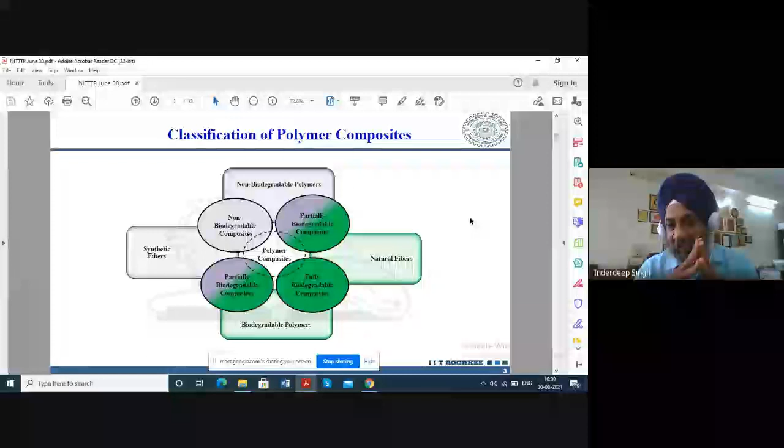Based on polymeric composites, most of the polymers we use these days all across the world, not only in India, are non-biodegradable polymers. Polymers like polypropylene, polyethylene, epoxy, and polyester, which are used for making polymeric parts or polymeric matrix composite parts, are non-biodegradable in nature, and that is a big concern for industry as well as governments.

Government policies are slightly in favor of sustainable materials, biodegradable materials, environment friendly materials. So we have to slowly shift from non-biodegradable polymers to biodegradable polymers. On the reinforcement side also, most composites being developed are based on synthetic fibers like carbon fiber and glass fiber, but slowly there is a movement towards natural fiber. So we have to shift both constituents.

The research trend these days is towards development of fully biodegradable composites in which all constituents are natural, meaning the fibers are also natural. For example, there is a huge family of plant-based natural fibers, to name a few: sisal fiber, Grewia optiva, fibers from banana, fibers from pineapple. There is a huge variety of natural fibers available in our country which we can use as reinforcing members in any composite materials we try to develop, with a major focus on sustainability and environment friendliness.

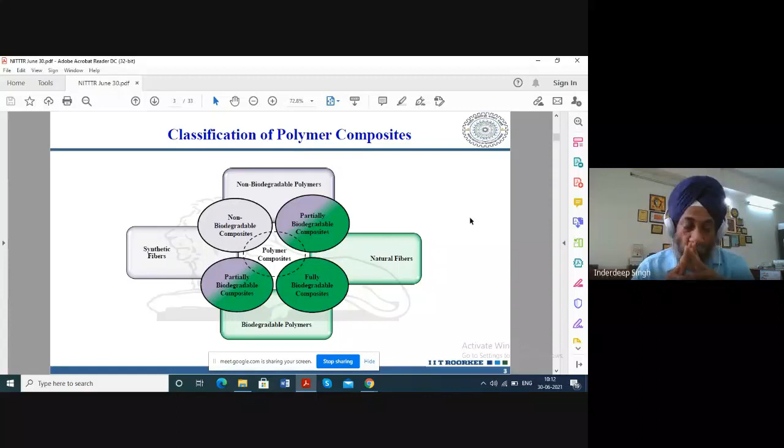So this is the basic idea about the polymeric composites on which we are working. My topic is not about the materials; the topic is about the manufacturing. So I have only included 2 slides on materials. Otherwise we can discuss these materials in depth, maybe in some other FDP program. I would like to discuss them in much more detail.

But what we are trying to discuss today in this short span of 1 hour or 1 hour 10 minutes is the comparison between the different manufacturing processes vis-a-vis 3D printing or additive manufacturing processes. There is a recent article which has been published. I will show you the details of that article. Many of you may have already read that article.

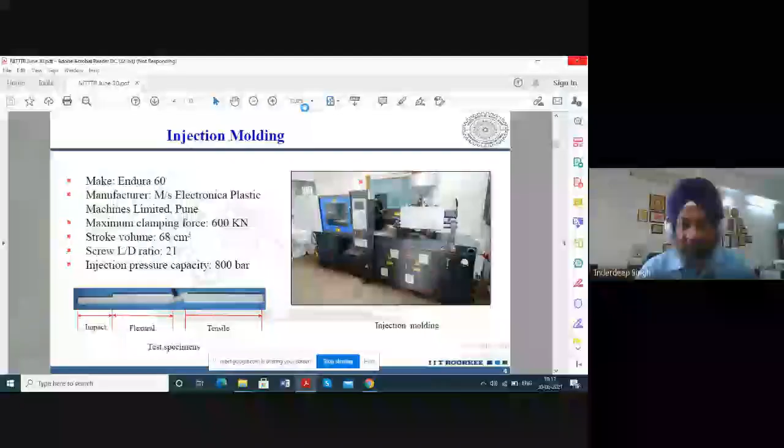So we can see here, we can get an impact sample. Let me try to increase the size of the slide. So we can get 3 samples. We can get an impact sample, as you see here. We can get a flexural testing sample. This same sample can be used for compressive testing also, and we can get a tensile testing sample. All these are as per the ASTM standards.

So let me try to see if we can size it. Okay, slightly it is more. Let me get. I think that is better, even slightly lesser. Okay, so this is the... sorry.

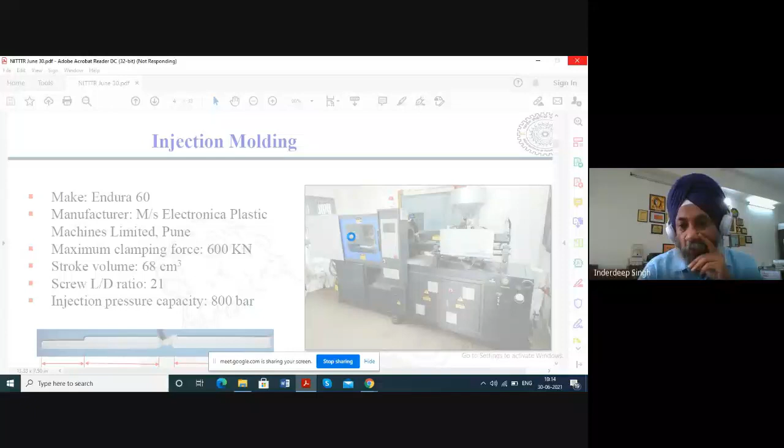So this is the machine that we have available with us, and the mold that we have designed can give us 3 samples in a single shot. And you can see the sprue here. I will show you the mold also. So this is the injection molding machine that we are using here. Let me first go to the mold. This is the schematic diagram of the machine which was shown earlier.

So normally in the direct injection molding process, as I told you, we are working in the field of composite materials. We try to put both the fiber and the polymer pellets together. We make a batch of polymeric pellets, which can be PLA pellets, and natural fibers. We feed it into the hopper, and then through this screw barrel arrangement, we are able to inject the mixture into the mold after heating and melting of the polymer.

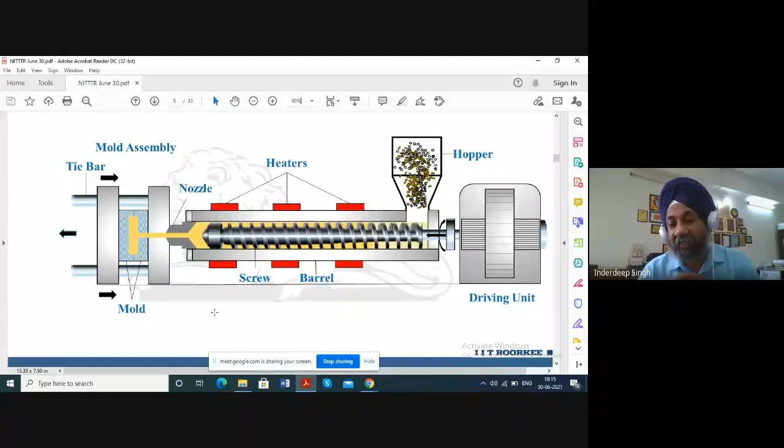Similarly, we can get impact samples, and once we have these samples, we can further cut them if we want to do a pin on disc type of wear analysis, or we can make holes in these fabricated samples to do machining analysis of natural fiber based composite materials. But for mechanical characterization, we have fabricated these. And the same mold we have used for making the samples for comparison of 3D printing FDM technology with injection molding.

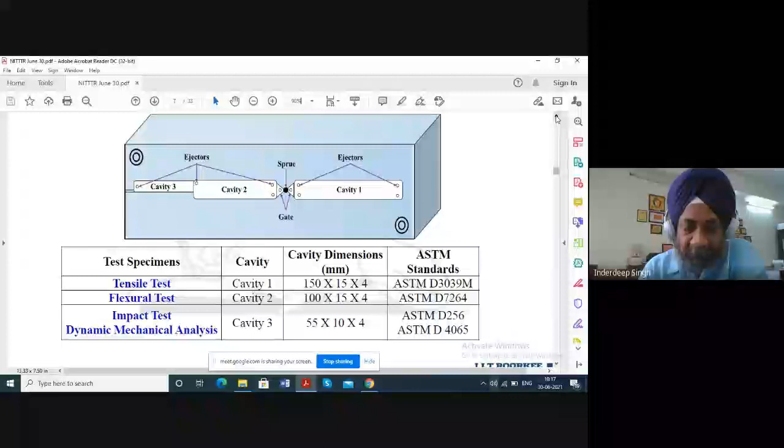So this is the injection molding process that we are using, and this is the injection molding cycle. This is for the benefit of those participants who have not studied injection molding. In injection molding, there are 6 steps. The cycle starts here; you can see the green portion. Then there is a mold close timing. This is based on the timing. So the mold will close.

Once the mold has closed, there is an injection stroke where we can control the injection pressure and injection speed, in which we fill the mold cavity with the material. Once it is filled, we hold that material in the mold for some time, by the time it solidifies and cools. These are two combination steps here. We hold the samples and we have to decide what is the holding time.

I am trying to emphasize this slide because it is not so easy to optimize all the parameters to get good quality samples. So we have to decide what is the injection pressure for this polymer, and if we are mixing the polymer and the fibers together to make a composite material, life becomes even more complicated. There are additional challenges in terms of choking of the nozzle, etc. And if we are using glass fibers, which are abrasive in nature, there are chances of wear of the nozzle as well as damage of the barrel.

So we have to see the various parameters like the injection pressure, injection speed, holding time, holding pressure. Then the cooling time we have to select accordingly. I will show you a fishbone diagram where all the parameters have been listed. Once the composite or the polymer has solidified in the mold cavity, the mold is opened and the material is ejected. Sometimes we use ejection pins to eject the material.

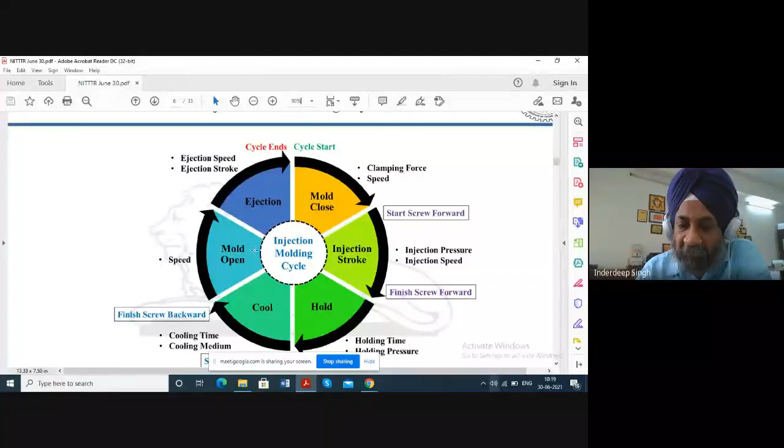So this is the basic mold opening and closing cycle, which is helping us to make injection molded parts. And this is the mold that we are using already; I have shared the details with you. Now this is the fishbone diagram of controlling parameters which affect the product quality.

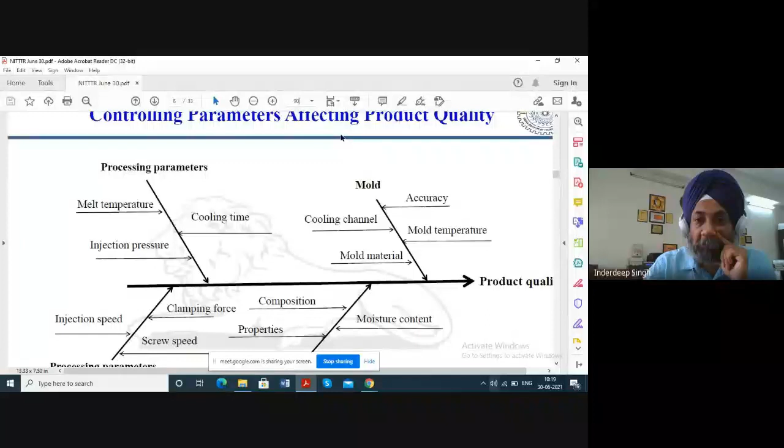So the product quality is controlled by processing parameters. We can see the melt temperature, injection pressure, cooling time. Then the mold also is important. We need a mold with good cooling channels, because for all these plastic parts productivity is very important; every hour or every minute we should be able to make a product. We cannot leave it to cool on its own, as it would take a lot of time to make the parts. So one of the advantages here is that the rate of production of parts is very high.

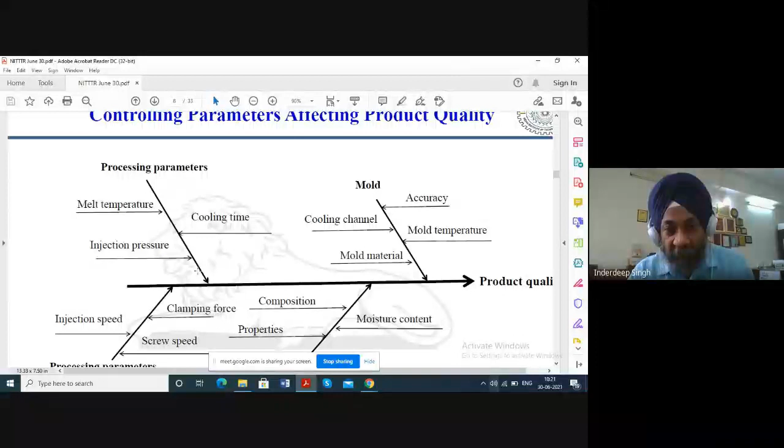Similarly, the mold has to ensure the accuracy and that the temperature is maintained inside the mold. So from the mold point of view, we have to control certain parameters, and from the processing point of view, we have to control certain parameters. All these processing parameters are shown here: clamping force, injection speed, screw speed, melt temperature, and injection pressure.

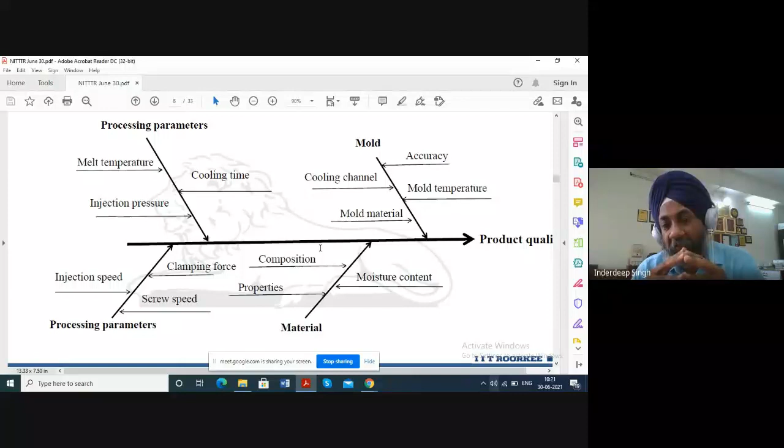For example, when a PhD or master's student starts working on a specific material, the first two to three months may be spent only on optimizing all these parameters, because the product quality of the sample has to be very, very good. There are different types of defects that you will get in injection molding of polymers, and once you are able to optimize all these parameters, the product quality will be better. So these are the basic ideas about injection molding.

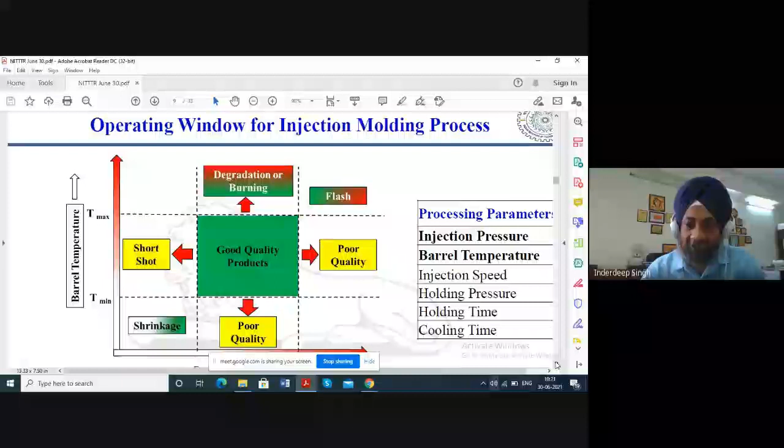On the screen you see the operating window for the injection molding process, a very important diagram where we are showing only two parameters. One is the barrel temperature, and on the x-axis, the other one is the pressure.

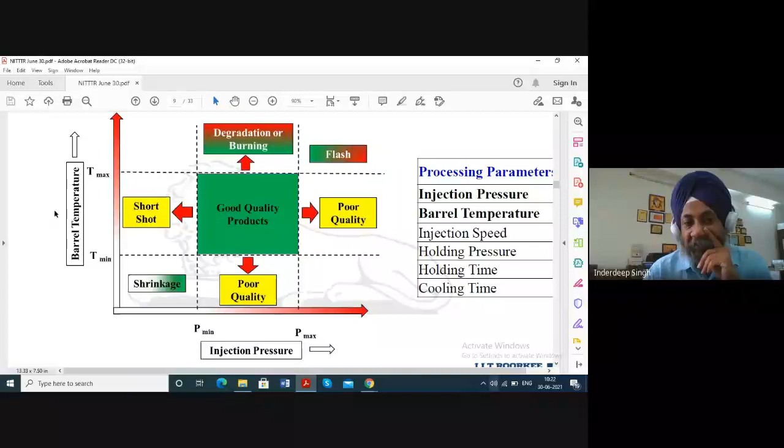So injection pressure. So you see here that for good quality products, there is an optimal window in which we should select our injection pressure and the barrel temperature. So if the barrel temperature is too low, there are defects. If the barrel temperature is too high, still there are defects.

Similarly, injection pressure also, if it is too high, there may be flash; the material may come out from the area where the two molds are closing. So the mold is open like this, it closes, and the flash may be seen at the closer points of the plane in which the two mold halves are closing.

So we can see that there are different types of parameters here. Only two parameters are shown, injection pressure and barrel temperature. Similarly, there are other parameters also, and we have to judiciously select the process window in which we can make good quality parts. So it is not so easy, it requires time, but if we spend time and do experimentation, we will be able to find out that process window.

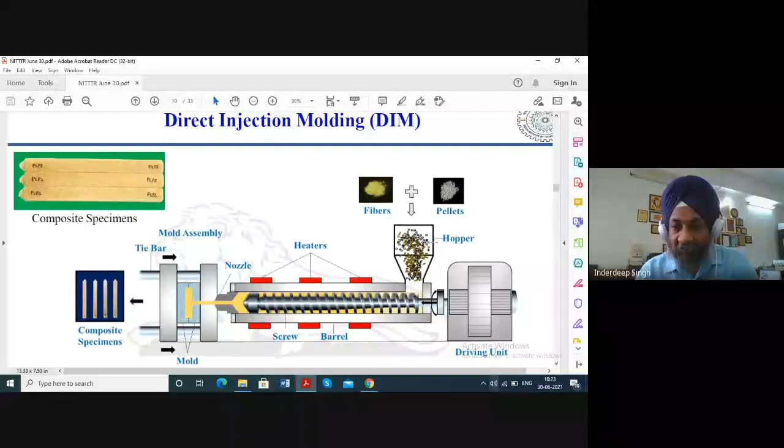So we combine these fibers and pellets and make a batch, and then we feed that batch into the hopper of the injection molding machine, and we can get the composite samples here. And these are three tensile samples shown. In our mold, we can make three samples in one shot. So these are the tensile testing samples, which can be used for finding out the tensile properties of the composites that are developed. So all these are polymer based composites that we have used.

And in addition to this, we have seen that sometimes the compounding may not be too good. So in that case, just a minute.

So we have seen that in direct injection molding, sometimes the compounding between the fibers and the polymers is not very good. So in that case, we have tried to use another process, that is extrusion injection molding. So I will just again show the screen. So in that case, we have used another process, that is extrusion injection molding.

There are so many images in the PPT, so I have converted it to PDF so that it is easy to share. But still, I think I will have to look at my device once again.

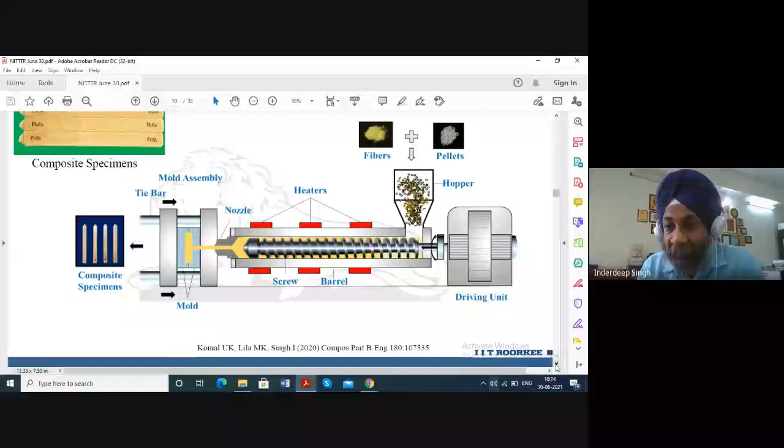So this is the extrusion injection molding process that we have developed. In FDM also, if you see, we have a nozzle through which the filament is fed, and we are able to create a product. So this is slightly analogous to that process. Here we are trying to extrude the fibers that you see here. These are the fibers, these are the pellets. So in case of direct injection molding, we were feeding both fibers and pellets directly into the hopper.

Here, instead of feeding directly into injection molding, we are feeding them into an extrusion setup. This is the extrusion process. In extrusion, we are extruding this using the similar principle, and then we are getting a composite strand which we are then pelletizing. Pelletizing means cutting it into standard sizes, and then we get a composite pellet. So composite pellets are clearly seen here. So these pellets basically have fibers and the polymer.

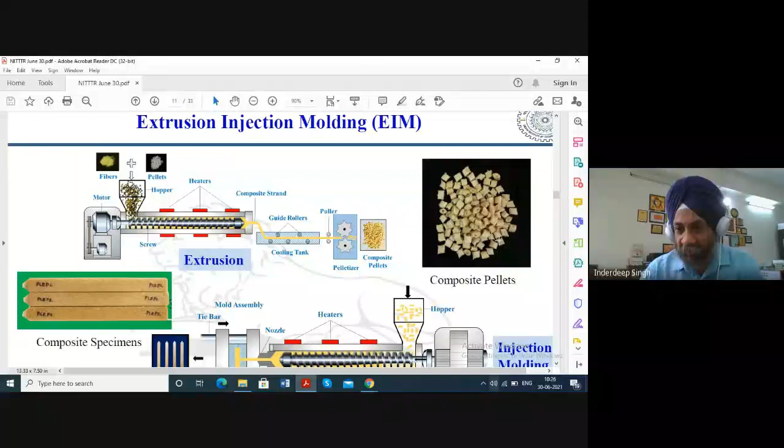So natural fibers and polymer have been compounded or blended together in the extrusion process, and then these composite pellets we are using as raw material for the injection molding machine. So therefore the name of the process is extrusion injection molding. So this is slightly similar to, just a minute.

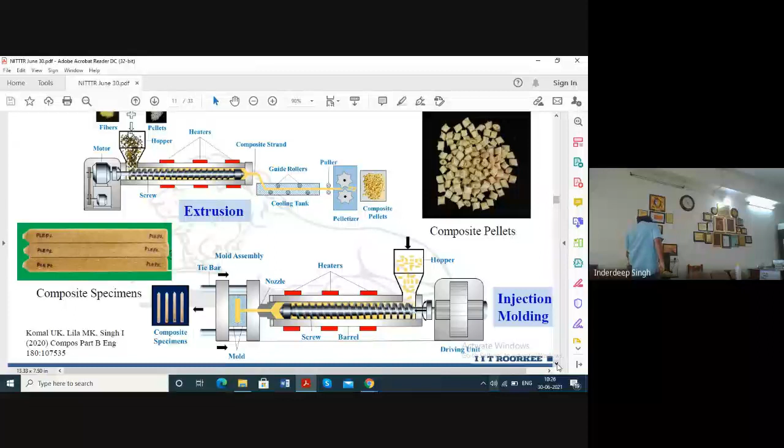Okay, sorry for the interruption. There was an important phone call.

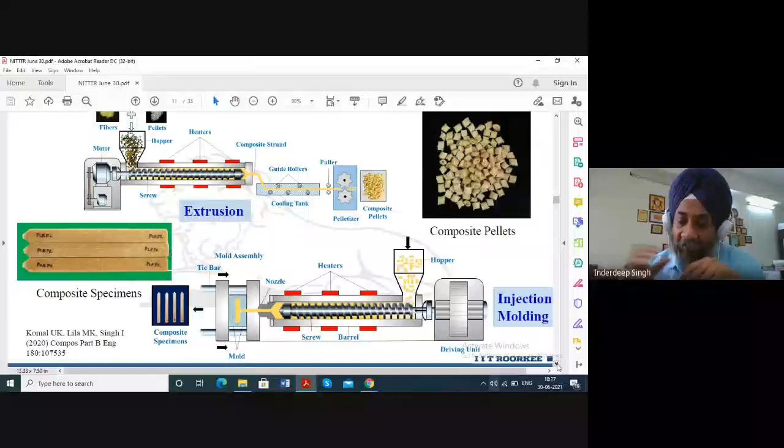So here we see that we have composite pellets. These pellets we are using as feed for our injection molding machine. Now, one of the questions may be why we are creating these composite pellets first, adding an additional process, why not put the fibers and the polymer directly as in the previous process. So we have found out that compounding helps to improve the interfacial adhesion between the fibers and the polymers, and we have reported all the findings and how extrusion injection molding is better than conventional or direct injection molding.

I think the source of the article is also shown here. This is our article in Composites Part B. So the details are available there, but for today's understanding we can just keep in mind that the composite pellets, once compounded using the extrusion process, are used as raw material for the injection molding process, and in injection molding again we make the sample. So for comparison purposes we are showing the same tensile samples as we have seen for the direct injection molding process.

So coming on to the next process, I will just briefly talk about this process. This is not directly related to our comparison purpose, because for comparison we have not made samples by this process, but this is another process that we have at IIT Roorkee in our lab. So we have a compression molding setup.

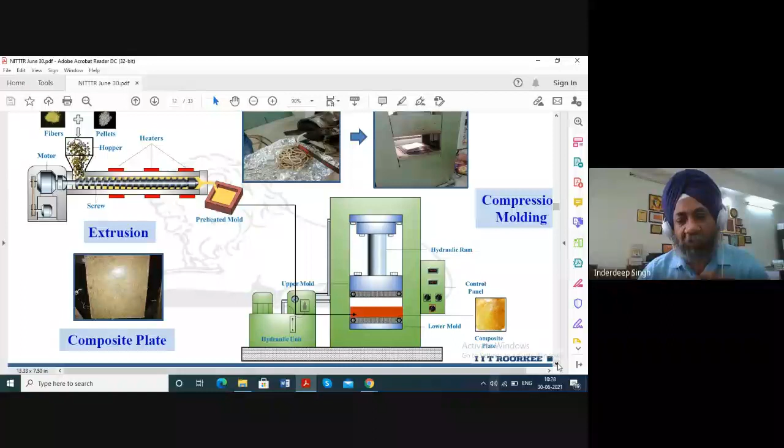So in case of extrusion, if I go to the previous slide, you can see that we were pelletizing the samples. You see here it is. This is an additional setup that we have designed and developed for pelletizing. So we are making the pellets which were used as raw material, but in the next process we are not pelletizing.

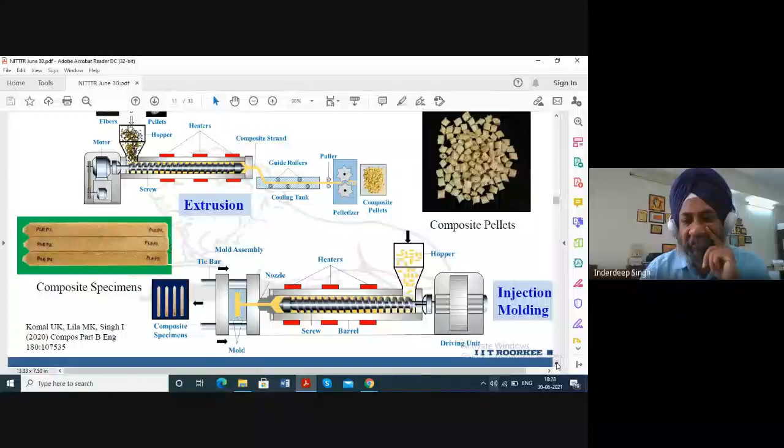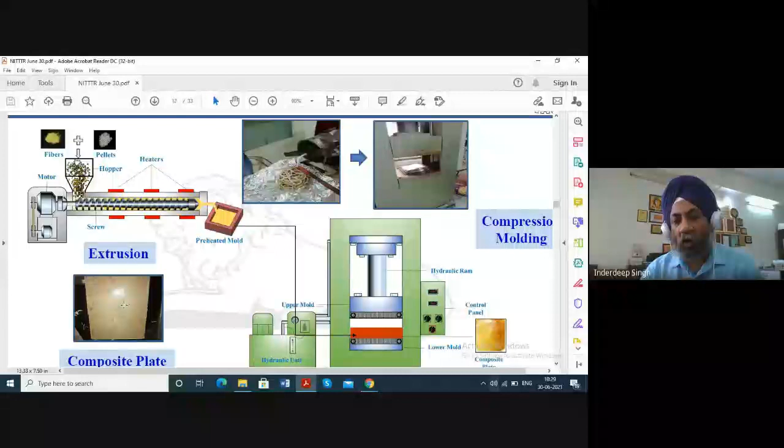So the images are also shown here. You can see this is a composite plate which can be fabricated. So if it can be enlarged, you can have different sections. You can see the fibers are uniformly distributed all across the polymer. This is the actual image. Both these are actual images but with different polymers. So this is another process that can be used for making polymeric parts.

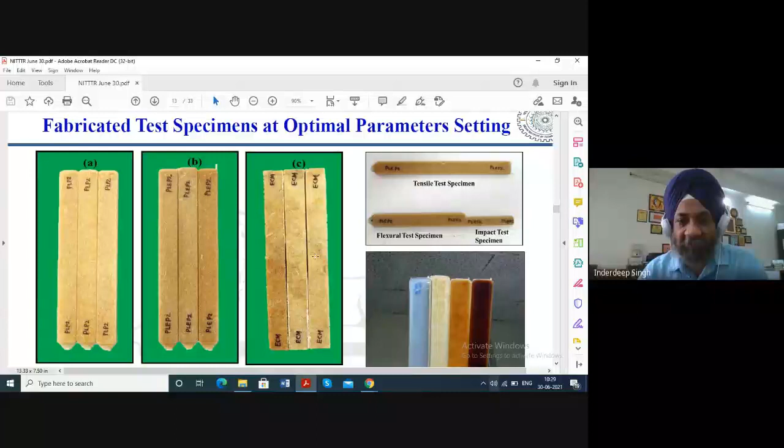So this is all that we have related to the conventional manufacturing of polymers and polymer based composites at IIT Roorkee. So these are the fabricated test samples on your screen. An important point here that you can note is that these three are made by the different processes A, B and C. A are made by direct injection molding, B are made by extrusion injection molding, and C are made by extrusion compression molding.

So in extrusion compression molding, we are making a plate and then we are cutting the samples as per the ASTM standards. So you can see these are fairly rectangular samples, but here, since they are coming from the injection mold where we are getting 3 samples in a single shot, this is the place where injection takes place. On the other side of this we get the flexural and the impact samples. These are tensile testing samples shown here. So here you see a tensile testing sample, a flexural testing sample and an impact testing sample, natural fiber based.

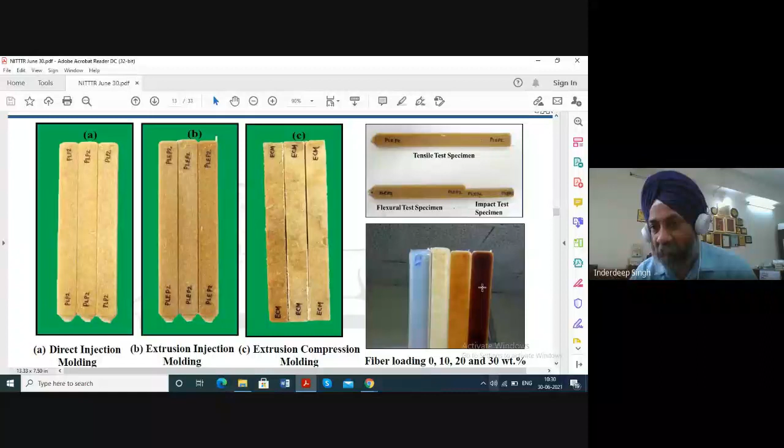And these are the other images which show how the samples would look when you add the fibers. So in the first case, the purely white sample, there is no fiber. In the second one, 10% fibers by weight, then 20% and 30%. At 30%, it gives a completely wooden look, and sometimes it becomes difficult even to recognize whether it is a wooden product or a natural fiber-based composite product. So these are the samples that we are able to make.

Now this was the work that we were doing, and one fine day, one student who was studying BTech in polymer science at IIT Roorkee approached me: sir, I want to do some work, my area is polymer science and engineering. So just while discussing with that student, one idea came to our mind: why not compare the performance of the injection molding process that we are using with 3D printed parts?

So that was how the idea germinated, and then slowly we started working on that, and after so many iterations found the optimal parameters. I will show you the optimal parameters that we have seen. We compared the performance of the two, and the results I will be able to quickly show you today.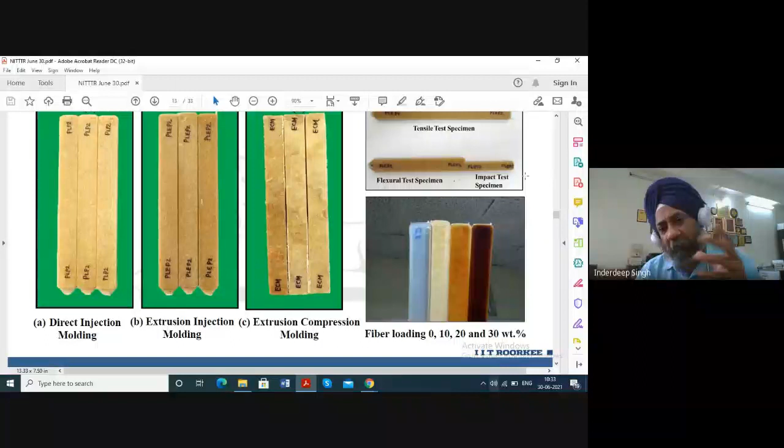Then also next level, which properties are affected on recycling, which are not affected, and what is the percentage degradation in properties with every recycling stage. So there can be different areas in which the work can be taken forward. So up to this level we have already achieved the success in making different types of composite materials based on different types of fibers. One of the recent PhD students, I will just go back and show you the name. Maybe you can contact him on LinkedIn.

Here you see in this article, Ujendra Kumar Komal, UK Komal. He has worked on pineapple fibers and banana fibers and done the degradability and the recyclability study of these composite materials, that how they will behave under different set of environments. And the other,

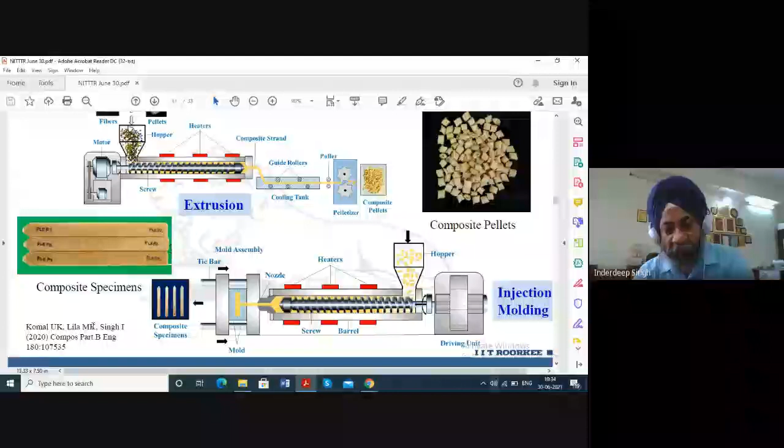Dr. Manish Kumar Lila, you see here, MK Lila. So Dr. Lila has worked on the bagasse sugarcane waste fiber, bagasse fiber, and worked on the recyclability, fiber extraction and characterization of sugarcane waste fiber and munja fibers. So different types of fibers he has used and made composites and worked specifically on recyclability and characterization of the materials. So this is the work which we have already done.

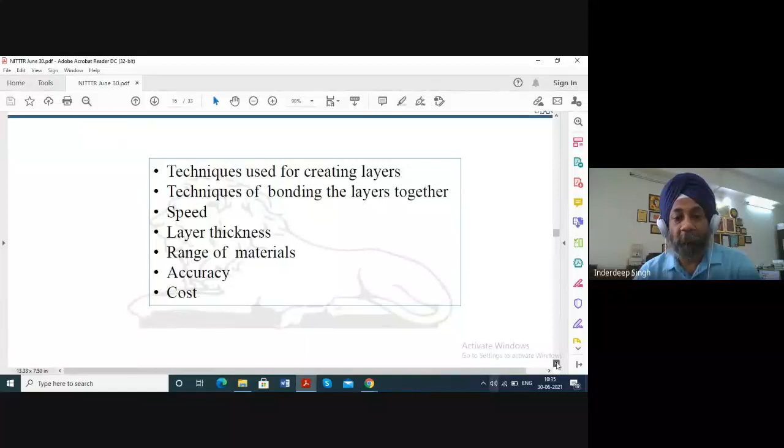Now in additive manufacturing, I taught this course on product design and development, and one chapter was on rapid prototyping. So I was reading a good book maybe 5-6 years back, and I found out that there are 70 to 80 different technologies. This is the book which was published maybe 5 or 7 years before that. So maybe 15 years ago, there were around 70 to 80 different techniques which fell under the broad umbrella of additive manufacturing or rapid prototyping.

Now, all these processes are different in a way. Now, how they are different? They are different in their techniques used for creating the layer. For example, if you talk about stereolithography apparatus, the mechanism in which the process will operate and create the prototype layer by layer is different from what we see in fused deposition modeling. If we talk about laminated object manufacturing, the way in which we deposit the layers will be different as compared to selective laser sintering. So all these processes have some inherent differences in the way they operate.

So techniques of bonding the layers are different. The speed at which the prototype or the functional product is formed or fabricated is different. Layer thickness range may differ from process to process. Range of materials is an important point, because once we think of buying a high-end rapid prototyping setup, mostly I have seen, this is my personal opinion, that the materials are more or less patented, or more or less fixed for a specific brand of machine that we want to procure. So we don't get much flexibility to alternate materials on the same machine.

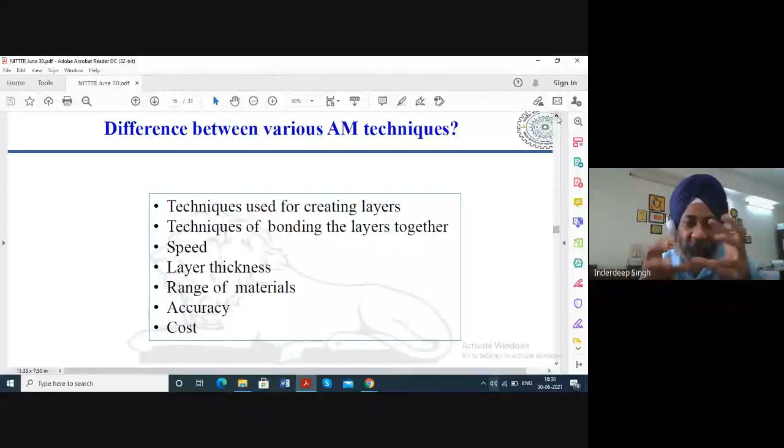That setup was used for experimenting with different parts, part thickness, fill density, raster angle, and all those optimization studies. We ask students to do trial and error, fixing together, looking at shrinkage, whatever investigation, trial and error iterations, design iterations you have to do with a setup where the material cost is low. But once your design and other aspects are finalized, then you go for final fabrication of your part on the machine which uses a costly raw material.

So cost is an important parameter. This is just an overview of how the processes are different. But we have selected the simplest and most common process that is used and available, that is the FDM process.

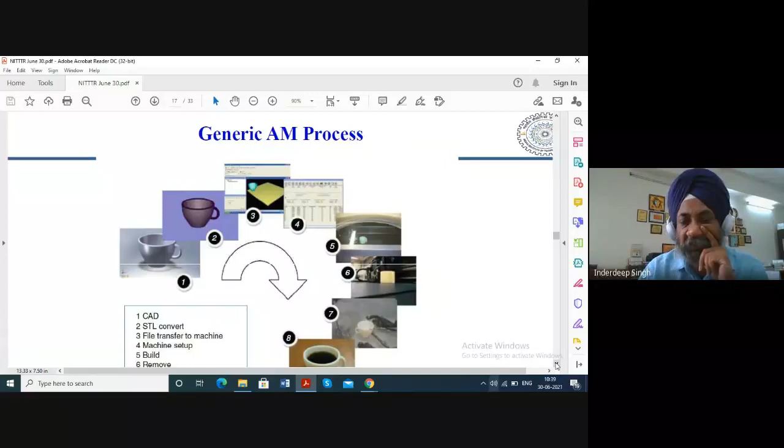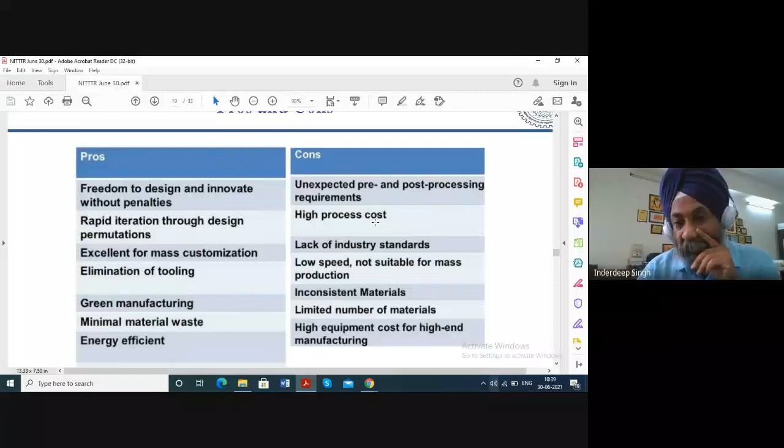Now, what are the advantages and limitations? I will talk about the limitations first: high process cost, because sometimes the materials are patented and we are not able to use our own material for a specific 3D printing or rapid prototyping technology. Limited number of materials are available - that is also one challenge. High equipment cost for high-end manufacturing.

As I told you, we have different setups here in the Tinkering Lab. One of them is a high-end manufacturing setup which uses a material that is also patented and very costly. So these are some of the challenges: process cost, material cost, and many times we have to go for pre- and post-processing requirements. So we will see, with the help of a diagram, how conventional and rapid prototyping processes compare in terms of cost and complexity.

But there are many advantages. Material waste is reduced in case of additive manufacturing processes. These are energy efficient, material wastage is minimum - it's green manufacturing, energy efficient processes.

As well, a major advantage is mass customization. Products can be manufactured with a wide variety, which can also be done with conventional techniques, but that requires huge investment in terms of molds and dies, which can be a deterrent - because the conventional plastic chairs we use in canteens or sometimes in our homes, the cost of the mold is very, very high. Now suppose we want to change the design of that chair, the mold cost is a big deterrent.

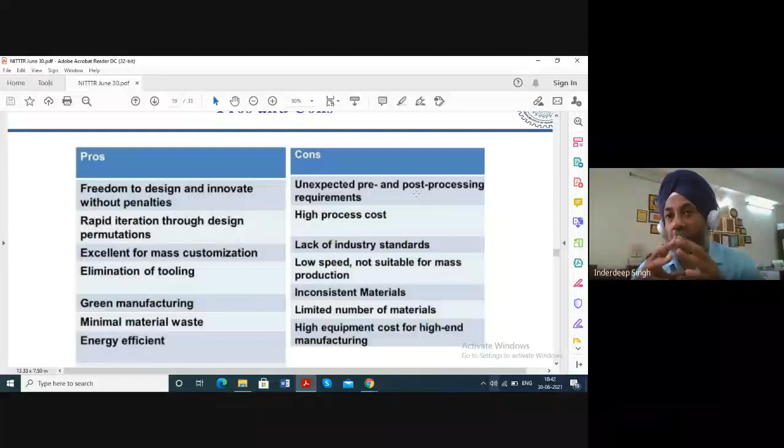So both have their own advantages and limitations, but one limitation I will show with the help of a diagram, which I have taken from a recently published research article, is related to mechanical properties - how they compare to conventional manufacturing processes for polymers. There it is seen that in 3D printed parts, the mechanical properties are slightly lower.

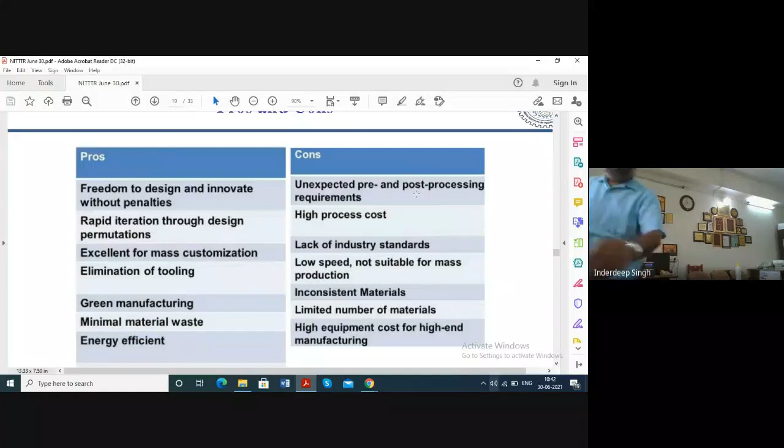Okay, so mechanical properties are an important point for comparison, because we have to see whether the properties we get with conventional manufacturing processes can also be achieved with rapid prototyping or 3D printing processes.

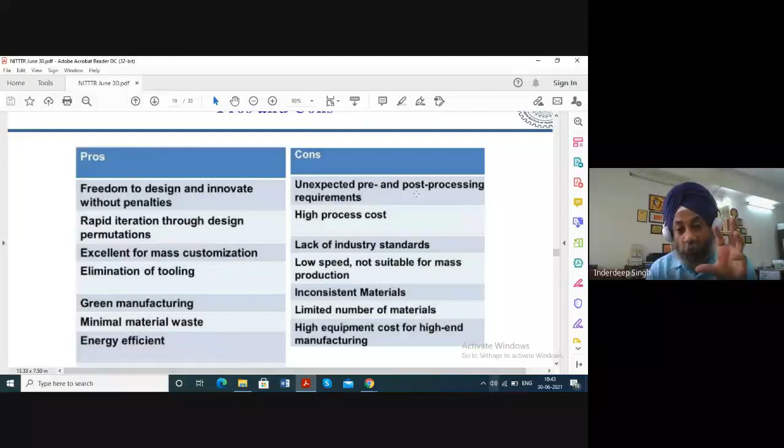That was the idea with which we started working on this article, and we were able to prove that yes, 3D printing with specific optimization parameters, or parameters selected judiciously, can help us develop parts, components, prototypes, patterns, or tools with comparable performance to conventional manufacturing processes like injection molding - but only with specific optimized parameters.

We are not saying that at every set of 3D printing parameters, whatever part you make will be comparable in performance in terms of mechanical properties with parts made by conventional manufacturing processes like injection molding. We have to first optimize the 3D printing parameters, make the sample, and then compare it with injection molding samples that are also fabricated at optimal process parameters. That is what our work was about.

One important application area for 3D printing is where the number of parts required is very low. For example, there may only be a requirement of 10 parts to be used as pattern materials, and the complexity of the design is significantly high. If we want to make a plastic pattern using an injection molding machine, the cost of the mold will be significantly high and will not be justified for making only 10 parts or patterns.

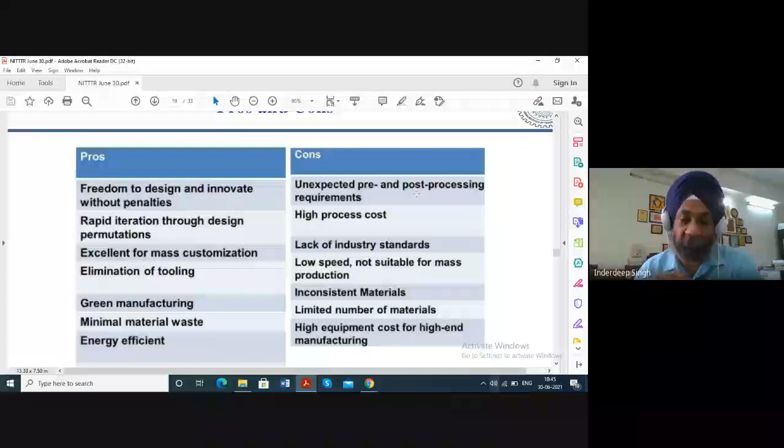That is an important challenge. Now, time is not all that important here, because we only have to make 10 parts. In that case, if the properties are comparable with 3D printed parts, we can very easily make those 10 parts using 3D printing with comparable mechanical performance. So that is a specific application area where the number of parts produced is less, but we still want functional parts with specific mechanical properties. That niche area is what we are trying to target in this comparative analysis.

Now quickly, let us see what we have done.

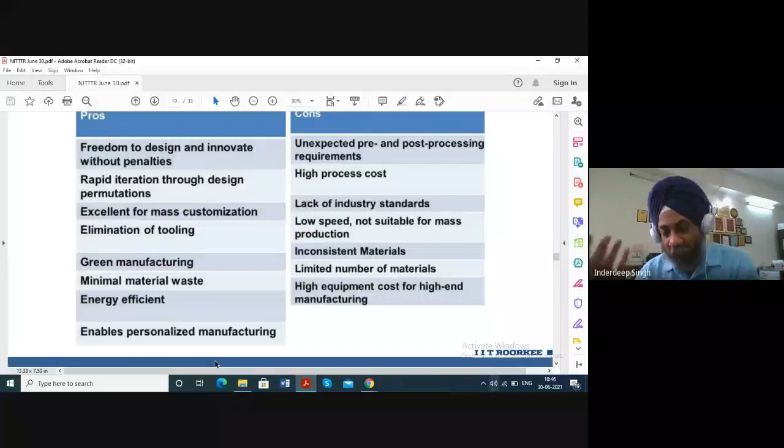One thing just came to my mind related to enabling personalized manufacturing. Many students visit our tinkering lab with specific requirements—for example, they've designed something customized for their friends, or there's a batch passing out and they have specific memories. Students come with a very specific design, do iterations, and make mementos or small insignias for their seniors when they are passing out. This has been observed. Because the cost of setups is going down significantly, it also enables personalized manufacturing—your personal idea can very easily be put into a 3D or tangible physical form using these processes. That is one of the major advantages of additive manufacturing processes.

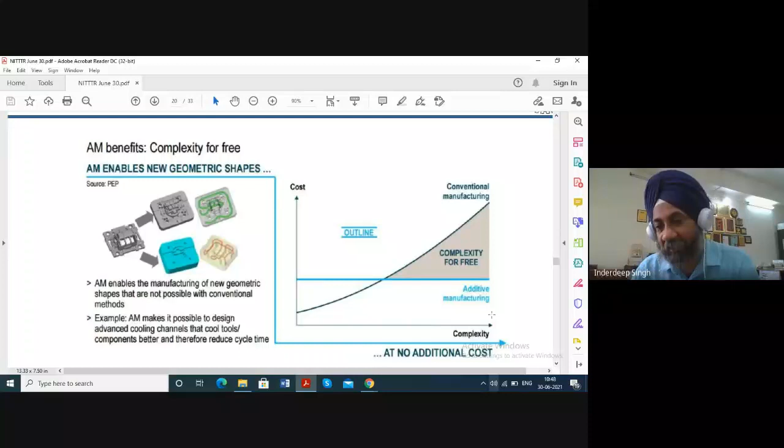But after a critical level of complexity, shown here, the conventional manufacturing cost overshoots the cost of additive manufacturing, which remains fairly consistent. That is an application area where we can use 3D printing—complex parts required in less quantity where the cost of conventional manufacturing is too high. In that case we can easily justify the use of additive manufacturing technologies such as 3D printing, as long as the parts have to be functional with bare minimum mechanical properties to satisfy performance, such as patterns in the casting process. Our study has justified that the mechanical properties are comparable to injection molded parts.

I have already tried to explain in the last 40-45 minutes the basic process of injection molding, how we are doing it, what type of materials we are using. Especially we are using natural fibers and biopolymers for making the composite parts, so that we address the issue of sustainability and environment friendliness.

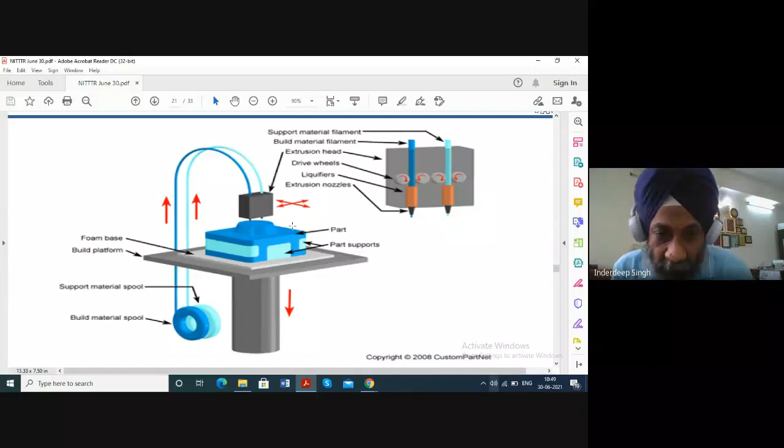Now we talk about FDM, and this is a very simple technology. The raw material is in the form of a filament, and that filament is fed to the nozzle where we have the heating arrangement, and this hot material is then deposited on the bed, and we are able to fabricate the part. So I will show you the fabricated parts that we have made.

So here we see the dark blue color showing the part, and the light blue color showing the part supports. Sometimes when the part design or the design of the component is quite complex or has overhanging sections, in that case we use the support material also. Therefore you see the two filaments: one is the build material, the dark blue color, and another is the support material, the light blue color. So we use two different filaments.

One is the support material, another one is the build material, and when the part is made, it will require a post-processing treatment in order to remove this support material, so that we get our final part. This is a very standard process, all of you already may be knowing this, so I will go to the next slide.

What we have done, maybe we will try to cover some of this. This is the process, how it takes place. Maybe we can skip this, I have tried to explain.

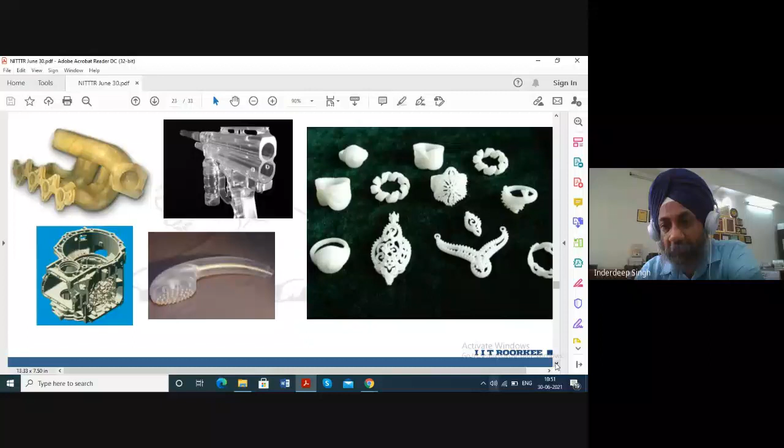These are some of the parts made not only by FDM, but by additive manufacturing in general. Many of these parts have been fabricated in our lab, in the tinkering lab, where students come up with different designs. These are some of the samples which the students have fabricated, images taken from our lab.

We can see that one of the major advantages of additive manufacturing technologies is complexity, because if we have to make these parts in wood or metal, it will require a lot of effort, which can be minimized if we use CAD models of these designs and then use 3D printing, LOM, or any other manufacturing method for making these parts.

As I told you, we can only compare at the optimized set of processing parameters. So in one of our earlier studies, we optimized all these parameters. Finally, in this study, we only focused on fill density: 80%, 90%, and 100%. All other parameters were kept constant, no change in any other parameters. All this optimization was published in another article, but here, for comparison purposes, we used that optimized set of parameters.

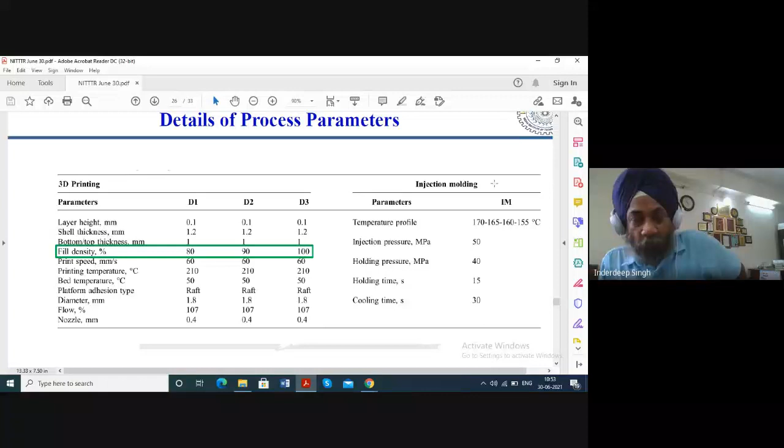The material, as I told you, I have shown you that we can pelletize the strand, extrudate, or filament into smaller pellets. So the same setup we used to pelletize the PLA filament, because here, if I go back, in this case we will be using a filament. A blue color filament is used, that is a PLA filament or wire, which is used as the raw material.

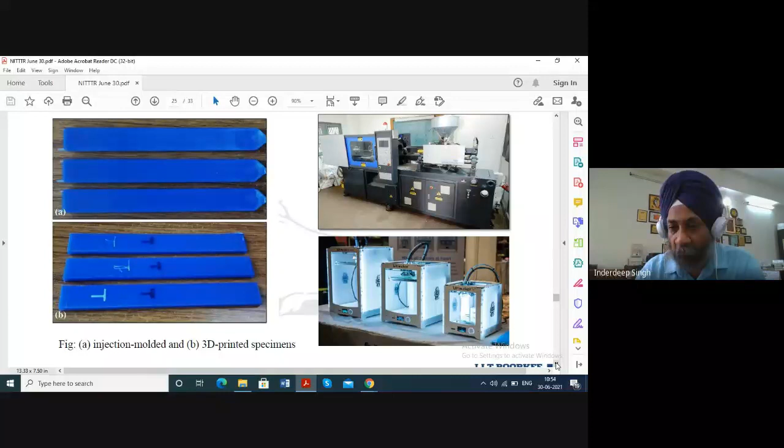But the same fiber spool or the same wire spool we used in injection molding, but here in the hopper, we have to put the pellets. So what we did, we used the pelletizing setup in our lab, which you have seen just after the extrusion process. So the same pelletizing setup we used to pelletize the PLA filament into the pellets, and those pellets were used in the injection molding setup.

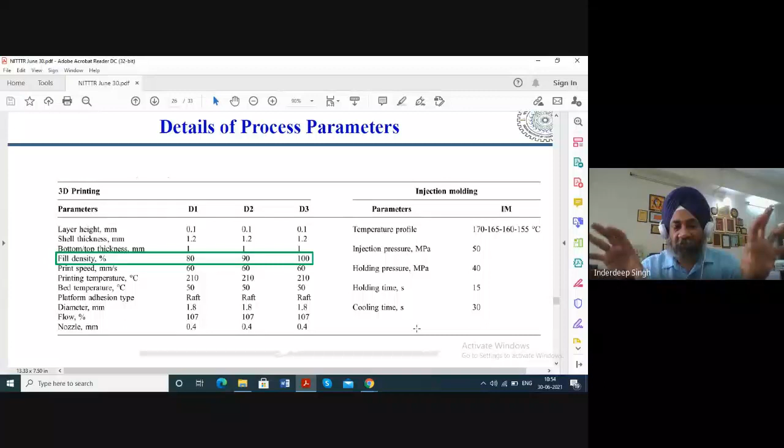And the parameters, as I have already discussed in the beginning, I introduced these terms. I have not explained in detail, but I introduced that these are the parameters which are used to control the injection molding process, like injection pressure, holding time, cooling time, temperature profile. So all along the barrel, we have to have a temperature gradient in order to get the right quality of the product. So both sets of parameters were optimized for both the processes, the FDM process as well as the injection molding process. And then we compared, and this article, as I told you, is available now online.

BK Kasaudhan was the student who was a BTech student. Komal was my PhD student. Both of them worked on this project, and this is published already in Journal of Materials Engineering and Performance. And this is the comparison of the mechanical properties that you see, or the mechanical performance. And all the three are shown here. So D1, D2, D3 are the three samples.

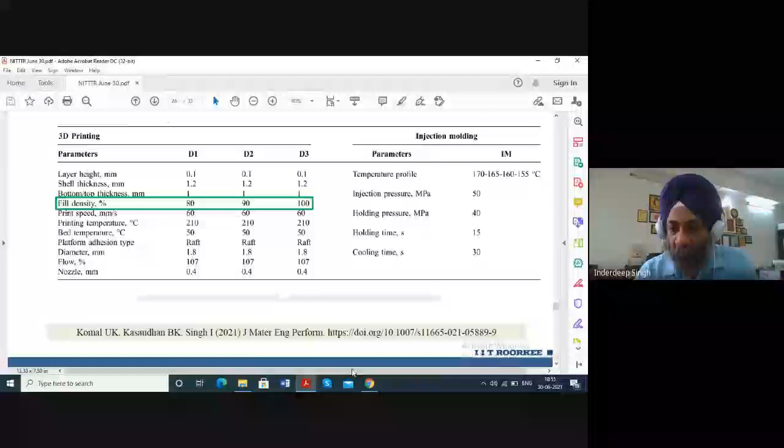If I go back to explain, because this is the important part of my presentation. D1, D2, D3 are with three fill densities here you see. D1 is 80% fill density, 90% and 100%, D1, D2, D3. And IM samples are the injection molded samples. So how these four samples are performing, as already published, is shown here. And if you compare the fill density, all of us know, no need to discuss, that higher the fill density, better will be the performance.

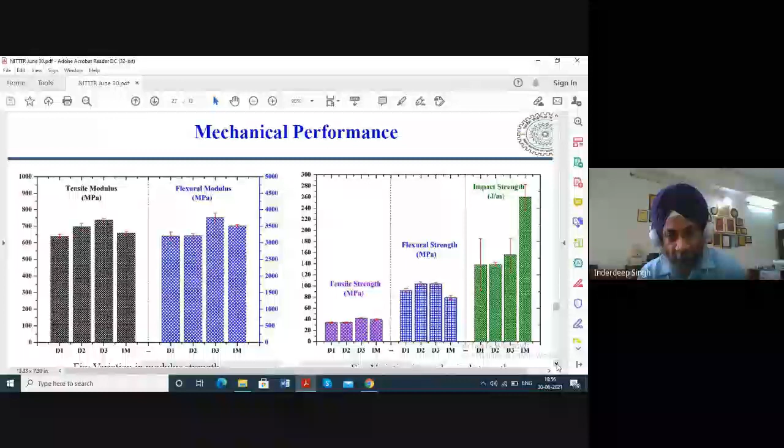So here we see that with the fill density, D3 is giving us the maximum tensile modulus and maximum flexural modulus, and it is comparable, even slightly higher than the injection molded parts. Similarly, the strength values also, tensile strength is comparable. Even the flexural strength with FDM parts is better as compared to injection molding. Similarly, the impact strength in case of the FDM parts is slightly less as compared to the IM part.

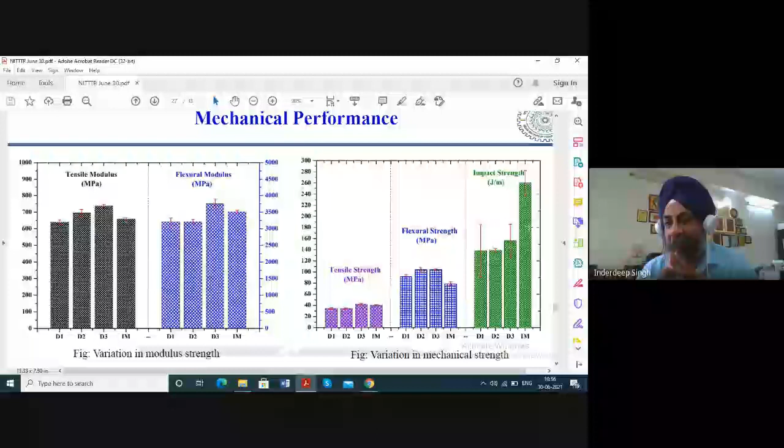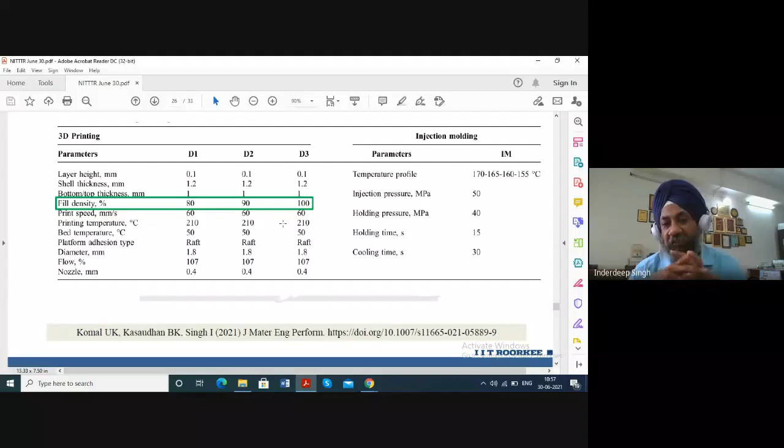So that will depend upon further optimization and further investigation, how we can improve the impact strength of our FDM parts, or what important parameters govern the impact strength of the FDM parts, because we have optimized these process parameters, as I again go back, based on the tensile properties only. Some of you may have this question, how these important parameters were optimized. In another study, we only tested the tensile strength of the samples, and we found out these are the best parameters for maximizing the tensile strength of the samples formed by FDM process, the material being PLA.

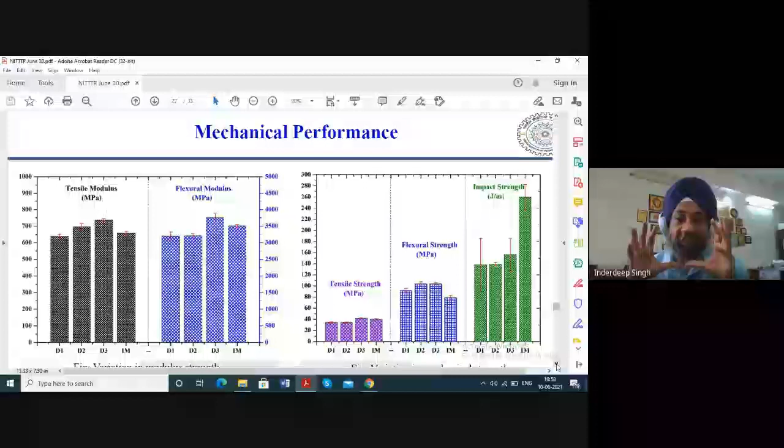So now here, another research direction that we have got after this analysis is that the impact strength also needs to be optimized, that these parameters may slightly change, so that we are able to have a trade-off between the tensile, flexural and impact strength. But the main point that we are trying to address here is that the properties are more or less comparable. There is not a very large difference in the properties, specifically the tensile and the flexural properties of the parts made by the FDM process and made by the injection molding process. Further, research is a continuous process. Further efforts can be put in this direction. So we have variation in modulus.

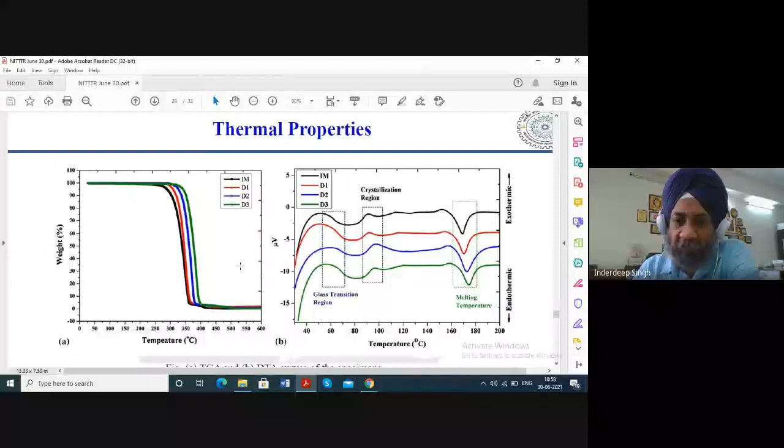Then we studied how the thermal properties will change, because all the processes are thermal based processes. In case of injection molding also, heating and cooling of material is taking place. In case of FDM also, heating and cooling of material is taking place. But there was not much significant difference in the mechanical properties or the thermal behavior of the material. So we studied the TGA and the DTA, but didn't find much gap.

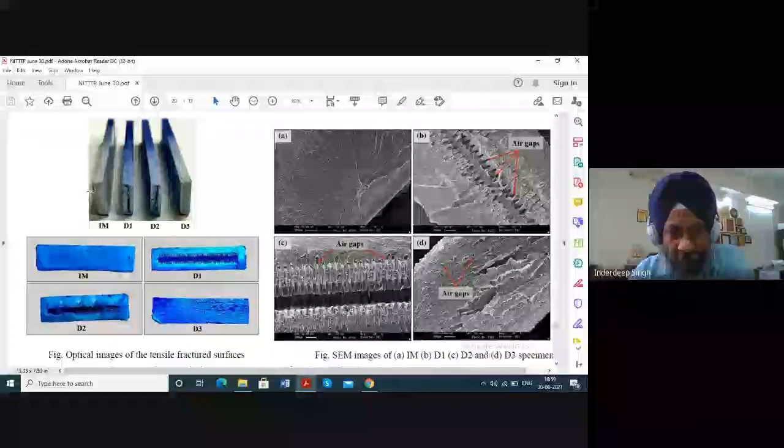And here you can see the cross section areas, optical images of the tensile fractured samples. We can see here IM is a completely rectangular, filled cross section, and similar is the case with D3 100% fill density, whereas in D1 and D2 we can see there are hollow sections inside. So optical images of the tensile fractured samples you can see here on your screen.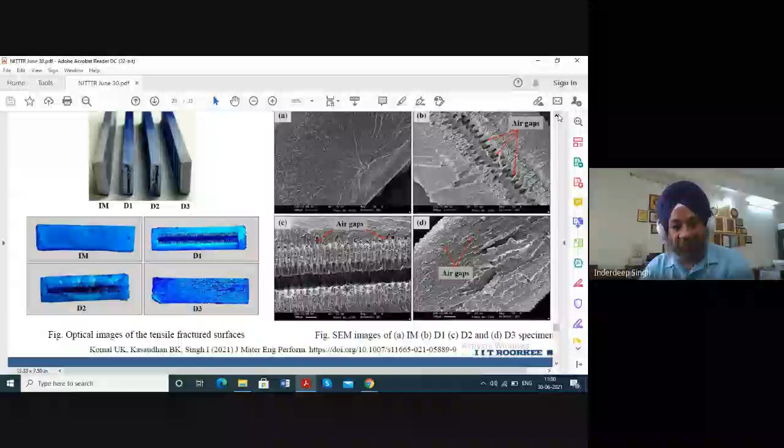Now, towards the last 10 minutes of my talk, these are the comparative analysis, and for more you can have the details of this article, Ujendra Komal, Kasaudhan and Inderdeep Singh. The complete details are available in this article, just published maybe 1 or 2 months back. And this is an important area of research.

Now, whatever comparison you saw on your screen was only for the pure polymer parts. Pure polymer parts are PLA parts, as you have seen, polylactic acid. But now there is a huge investment in composite materials or processes for composite materials that can be used for making different types of products: lightweight, environment friendly, sustainable products. For that, these setups are there, and a number of patents are now being filed.

Now this is a schematic representation of the 3D printing process using continuous filament with a printing head of single nozzle and dual nozzle. Now what are the nozzles? In composites you see here, this is a continuous fiber and this is a thermoplastic polymer. So fiber is coming and polymer is coming, they are getting combined in the nozzle, and the material is getting deposited on the building platform.

Here we see a nylon filament and a continuous fiber filament; we are using two different nozzles, and the material is getting deposited, and we are getting a composite material where two distinct constituents which are physically and chemically distinct are used to develop a composite material. So these are the setups being developed these days. Many of these are commercially available also.

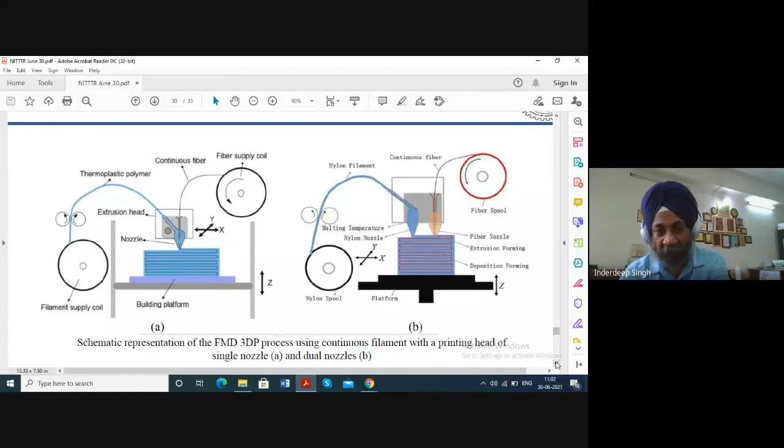That is the next direction in which we will also try to focus our energy: using the different types of natural fibers that we have used for injection molding or extrusion injection molding as a raw material for 3D printing of natural fiber based composite materials. So it may require some efforts. The source is also shown here. This is the latest paper published in 2020 on composite structures of natural fiber based composite materials.

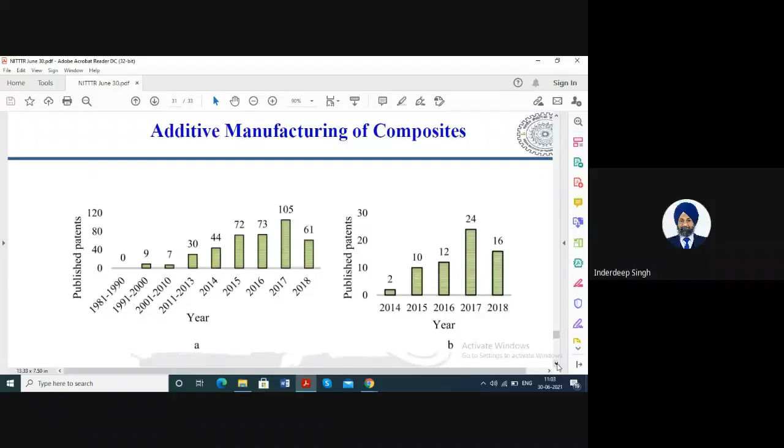Structures like Kabir SMF. These are the published patents in the field of additive manufacturing of composites. You can see year by year the number of patents is increasing. Lots of patents and papers are coming up. These are the different details, available in the same article.

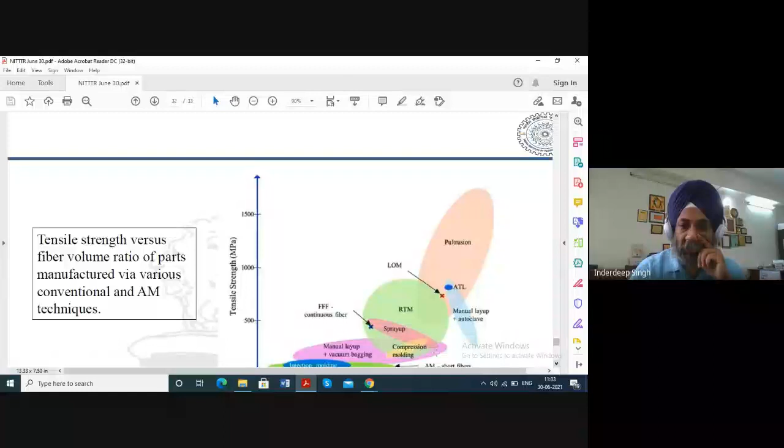And this is an important diagram, which our study also justifies, published in 2020. This is showing the tensile strength versus the fiber volume ratio of parts manufactured by different processes: tensile strength on the y-axis and fiber volume ratio, which shows the amount of fiber that we are able to incorporate in our polymer.

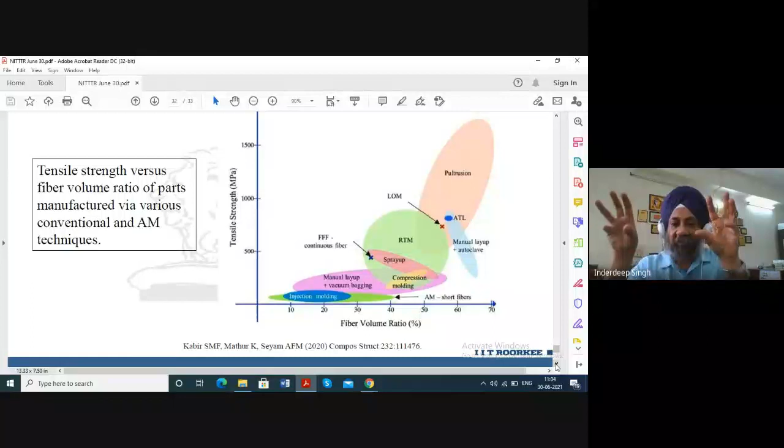As you know, in a composite we will have a matrix, and we will have a reinforcement or a particulate additive, called a filler or reinforcement. We combine them to make a composite. And here we see, as the fiber volume ratio increases, how it affects the tensile strength for different categories of processes. Pultrusion gives the maximum tensile strength because it uses long fibers.

But if we see the two processes that we have compared: the additive manufacturing process, that is the FDM process, which falls in the family of additive manufacturing processes. So we have taken FDM and injection molding.

So the tensile strength values that we can achieve are significantly lower, even lower than 500 megapascal for injection molding and the FDM process that we have used. But if we go for continuous fibers, the tensile strength can be significantly higher. So therefore, this shows that there can be a trend towards using continuous fibers in 3D filaments.

We see there are filaments of PLA. Many times we use filaments of nylon. We can use filaments of ABS, which is acrylonitrile butadiene styrene. So we use different types of filament. But these filaments are purely polymeric filaments. If we are able to integrate continuous fibers in these filaments along with the polymer, that type of process can give us very high values of tensile strength, which can even increase or augment the application spectrum of the parts that we are fabricating using the FDM process.

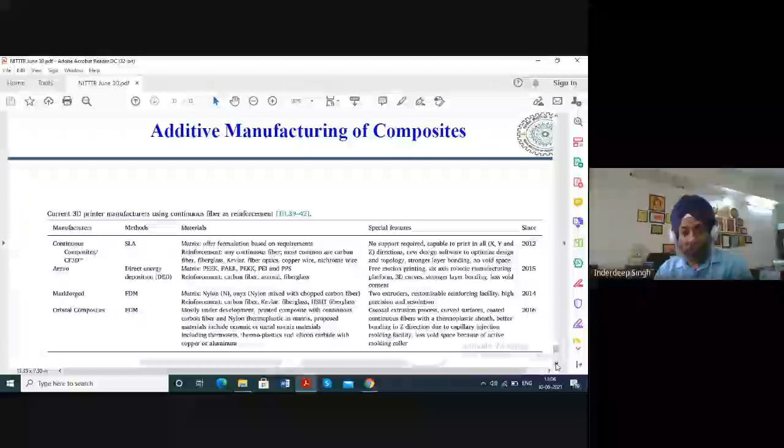And these are some of the 3D printer manufacturers using continuous fiber as filament. So already there are manufacturers who are manufacturing using the continuous fibers as filament, as reinforcement. So you can see CF3D-TM, Arevo, Markforged, Orbital Composites; FDM and SLA methods are using the continuous fibers also as the reinforcement. So we can see here different types of matrix are possible. You can see polyether ether ketone, then polyether imide, PPS. So you have different matrix materials.

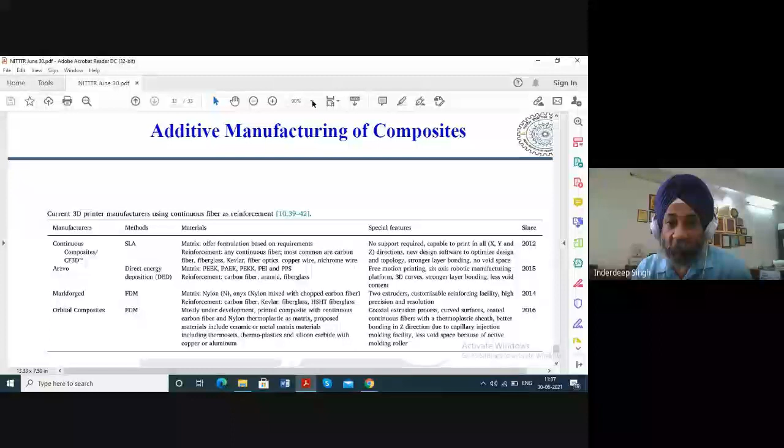If I try to increase the size, you may not be able to read. So I think now it is clear.

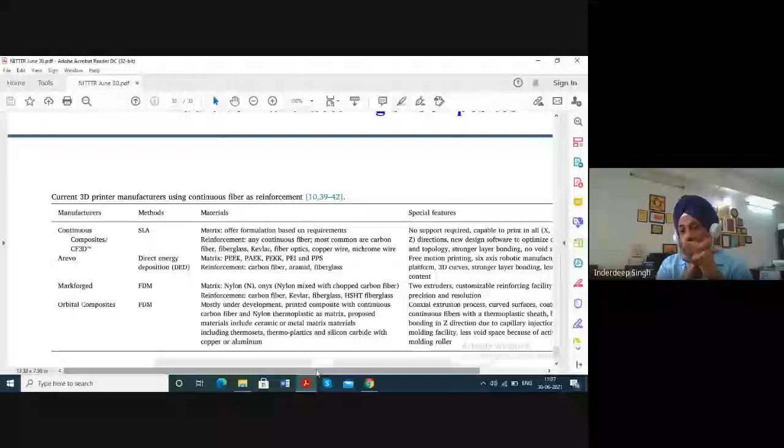So you have different types of polymers which can be used as matrix and different types of reinforcement. As you see, the fibers are carbon fiber, aramid fiber, fiberglass. Here also fiberglass, copper wire, nichrome wire. So you have different types of fibers which can be used. But as our target is towards natural fiber based filaments, none of the companies are manufacturing them till date, as per the data available in the public domain in the year 2020. So therefore, there is a research gap that we can identify.

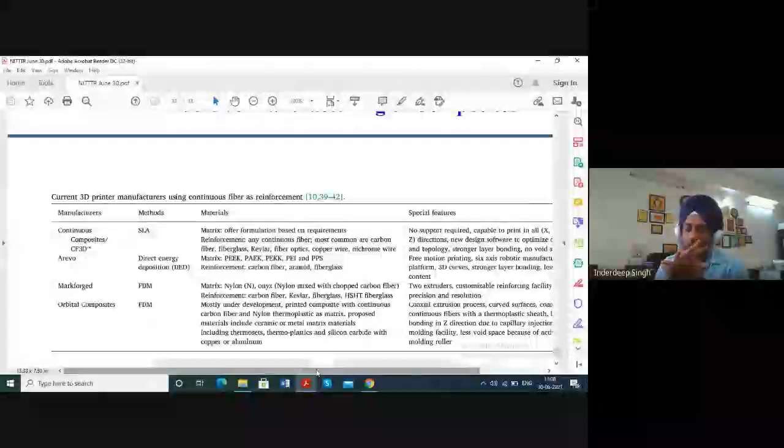The first thing that we can take away is that we can use continuous fiber filaments as reinforcement in the process of 3D printing. Also, these fiber filaments may not necessarily be carbon fiber or glass fiber, because they are synthetic fibers, they are energy intensive, and the carbon footprint is high. So if somehow we can research and develop filaments which are based on natural fibers used in continuous form, as well as polymers which are biodegradable and biocompatible.

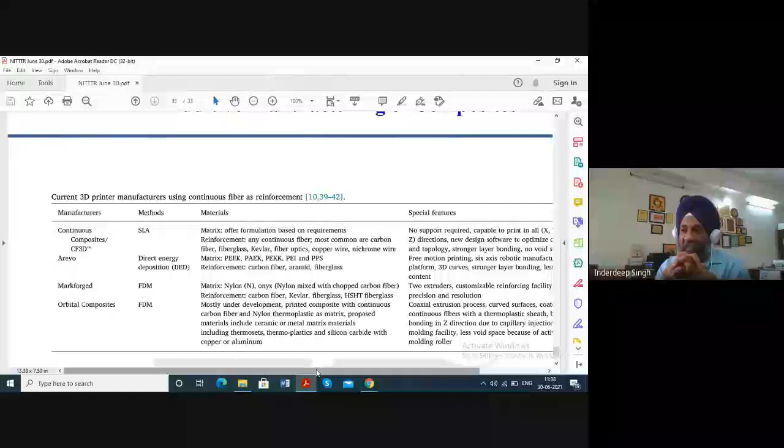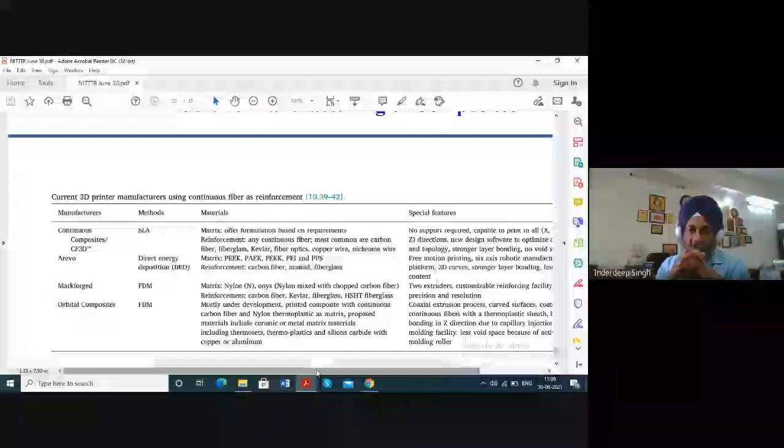Those kinds of natural fiber based biodegradable polymer filaments can solve a large number of environmental as well as sustainability issues. So that can be one of the important research trends that we will see in the coming 4 to 5 years. We will be seeing that 3D printing will be done using biopolymers having natural fibers as the continuous reinforcement in the filament. So I think that is my last slide.